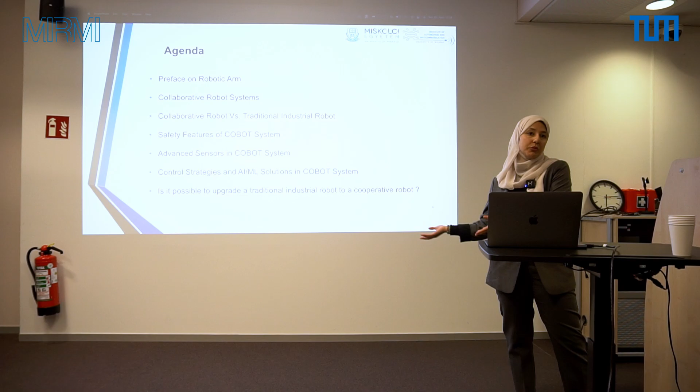After that, I would like to conclude my presentation with my actual research, where I would like to raise a question: if already the industrial robotic market has developed and designed millions of industrial robotic arms, is it possible to upgrade these robots to be cooperative and smarter, rather than building new ones from scratch? So we will answer this question in this presentation.

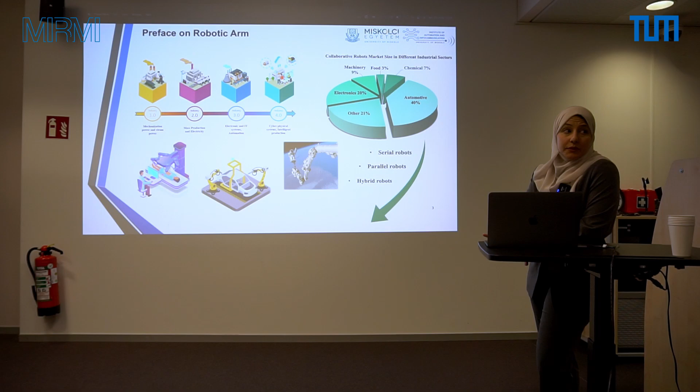If we look through the historical line of industry, as you know, we are in the age of 4.0. A lot of concepts are highlighted here: digital twin, cybersecurity, Internet of Things, and cobot systems, where cobot systems, it seems, are everywhere in different industry sectors like healthcare, automotive, and even space industry. Let me identify that regarding industrial robots, we have three categories.

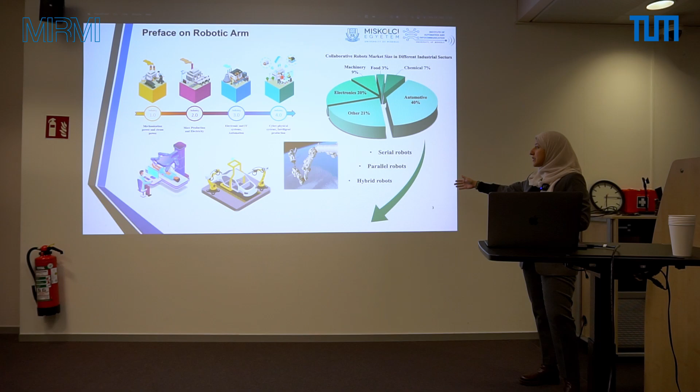We find mainly serial robots, parallel robots, and hybrid robots. This kind of categorization is related to the structure, the mechanical structure of the robot itself. In this presentation, I am dealing with robotic arms and collaborative robot arms.

So, two concepts should be highlighted, and we should be familiar with them. The first concept is the serial open chain structure. As you can see, the robotic arm takes its name from the human arm. Even the names of the parts are the same.

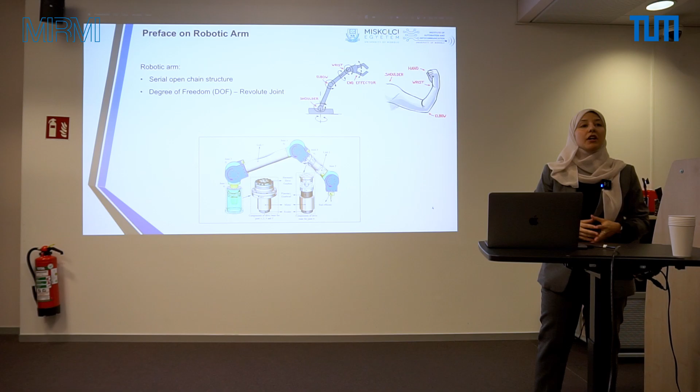We have the shoulder joint, we can find the elbow, the wrist, as well. The structure here is serial open chain. It means that we have a fixed base, and that base is connecting with different joints and links in a serial way. Why is this important to know? Because to know the structure of the robot, you can do your mathematical modeling, you can identify your dynamic model, which is important to identify the torque needed to move these joints and links.

The second concept is degree of freedom, DOF. When we are dealing with a robot, we say in industry or in the lab that this robot arm has 5 DOF or 6 DOF. The 5 DOF and 6 DOF relate to the degree of freedom.

The degree of freedom relates to the object: the object in 3D space should have 6 degrees of freedom—3 translations around x, y, and z, and 3 rotations around x, y, and z. For the robotic arm, every joint can receive 1 or more degrees of freedom, just like a human arm.

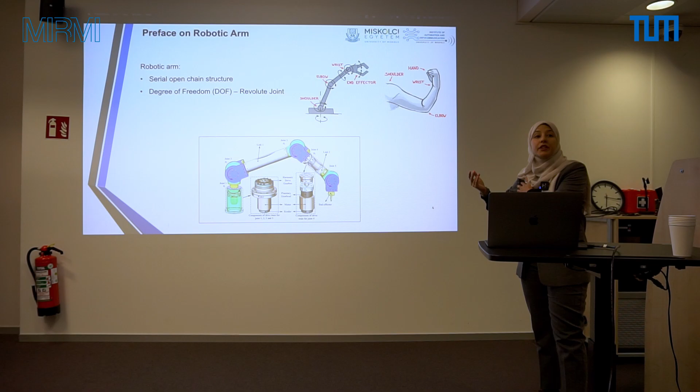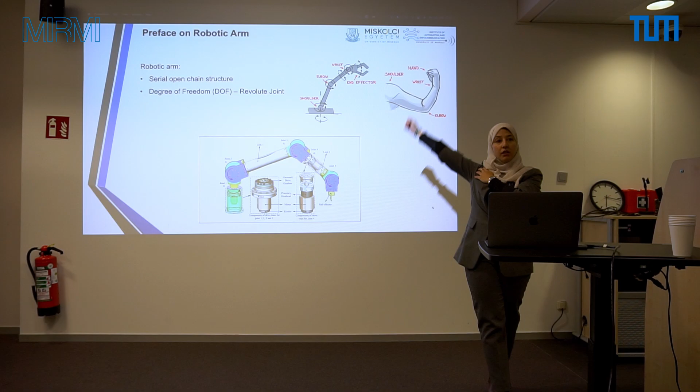For example, if I take the shoulder of a human arm, how many degrees of freedom do I have here in my shoulder? Three. Yes, we have 3: rotation around this axis, rotation around this axis, and rotation around this axis. So we have 3 degrees of freedom. The robotic arm also can receive, for every joint, 1 or more degrees of freedom.

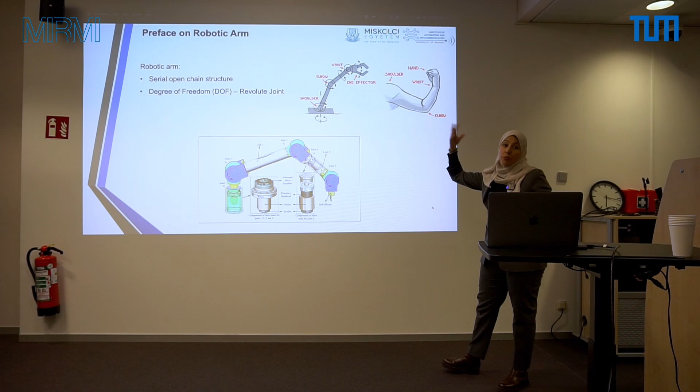Mainly, what we meet is a robotic arm with 5 degrees of freedom, where every joint includes 1 degree of freedom. These joints are moving with a motor, of course, and the motor compartment includes, as you can see, an encoder, which measures the position and velocity—the angular position and velocity. We have the motor itself and the gear head to increase or decrease the ratio of the torque or the speed, and sometimes a driver for the motor.

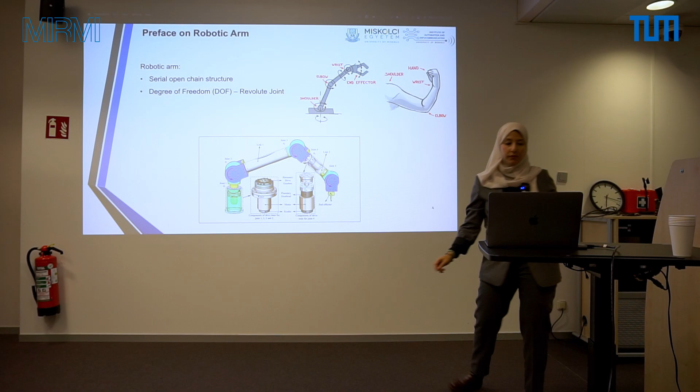So if we start to talk about Cobot, actually Cobot is a robotic arm, but with some advanced features to be friendly with the human worker. It's lightweight. If I can see from the first appearance of a robot arm, I can identify if it's a traditional one or a Cobot. How can I recognize this?

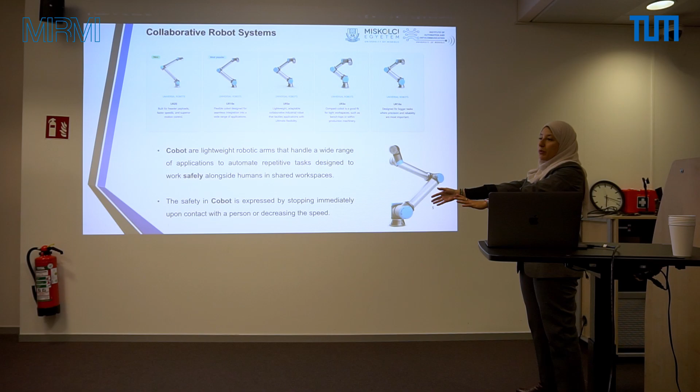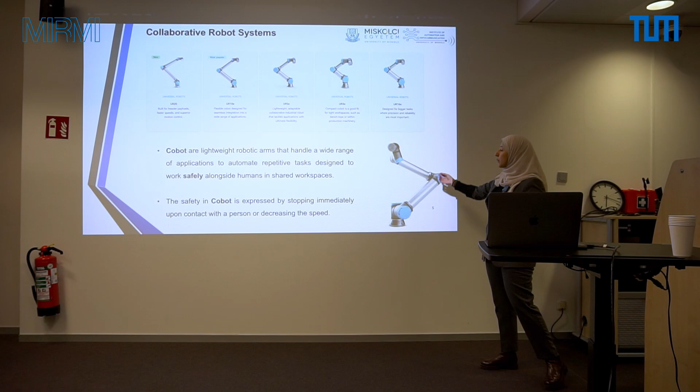From the shape. Mainly they have a curvature shape, not sharp edges. They are made with lightweight material, compact, with a compact size. They don't need extensive space to be installed. And they provide a very good safety feature.

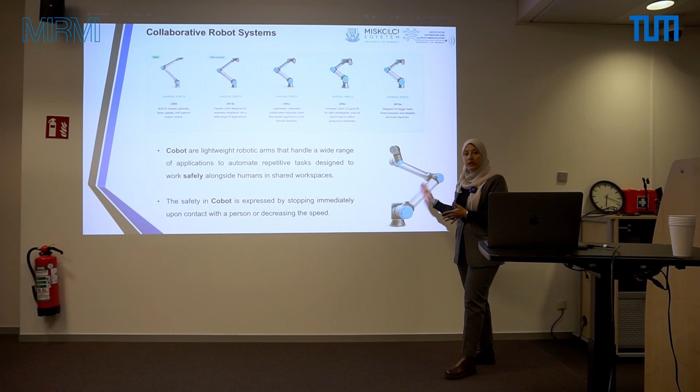The safety feature is the most important in Cobot. For example, if I am close to the robot or nearly close, the robot should stop or decrease its speed. Okay, this is a video, it will not do it.

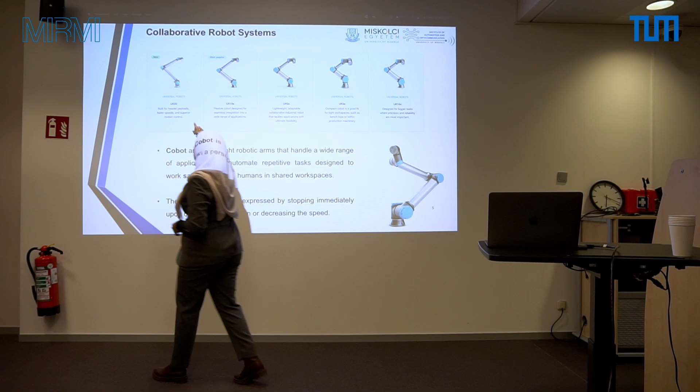Here in this slide, I am showing the top leader in Cobot systems, which is Universal Robot. As you can see, this is the newest one, UR20. If you see the characteristics, it's heavy. It can handle heavier payloads and it can be faster.

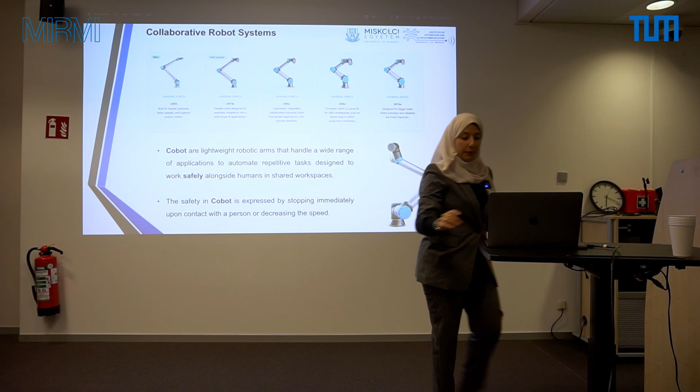Let me now go more deep. Cobot systems started to appear since 10 years ago, where traditional robotic arms have been here since decades. So I think it's important to know the main differences between these two systems. The comparison will be regarding the hardware, the software, and the graphical user interface programming environment.

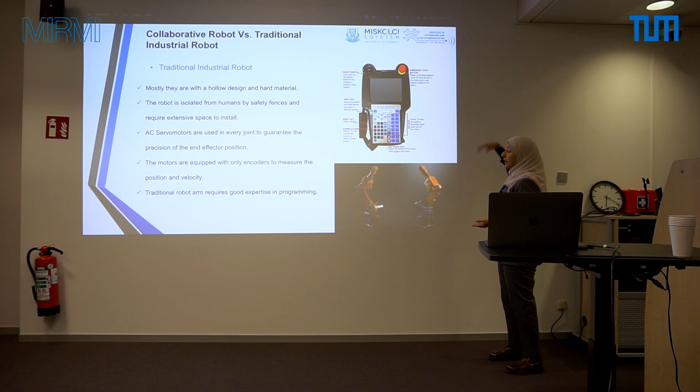So let's start with the traditional robot. As you can see here, from the first appearance, the body is big, usually more than 2 meters. And with the hard material, you can see it has a hollow shape, which can easily harm the person.

This is why we need fences. When we install a robotic arm in industry, you need fences, you need safety sensors like laser scanners, like light curtains, just to avoid the risk of harming the worker.

Also here, mainly the motors are servo motors. Why servo motors? Because in industry, let's say in automotive industry, I have many robotic arms handling doors of cars, welding. My important parameter is the precision. I would like to have precision regarding the position.

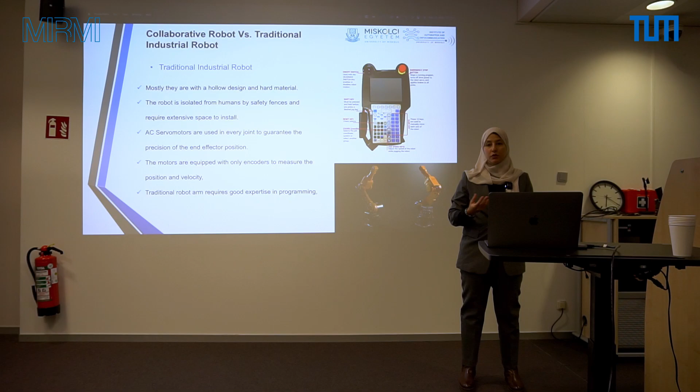So this is why I use a servo motor. A servo motor is a kind of motor which includes a closed control loop for the position, so it can provide good precision, but they are heavier. But we don't care, because here we are using hard material, so the servo motor is okay.

Also, these kinds of robots require very good expertise to program. It's not easy to program. First of all, the programming is through the teach pendant, we name it online programming.

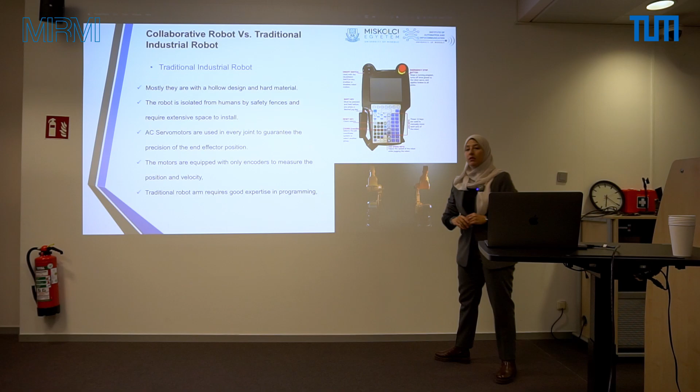It can also be offline through software, but 90% of the time we program these kinds of robots with the teach pendant, and the teach pendant is not so friendly.

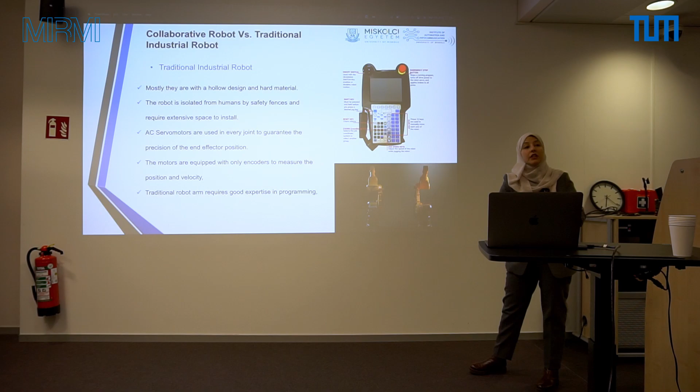For example, here you can see we sometimes have a lot of keys on the teaching pendant, and to create a position, you have to take your teach pendant and go to P1, then P2, then P3, then make the trajectory, circular or linear, according to your requirements. So it's not so friendly, and it needs time.

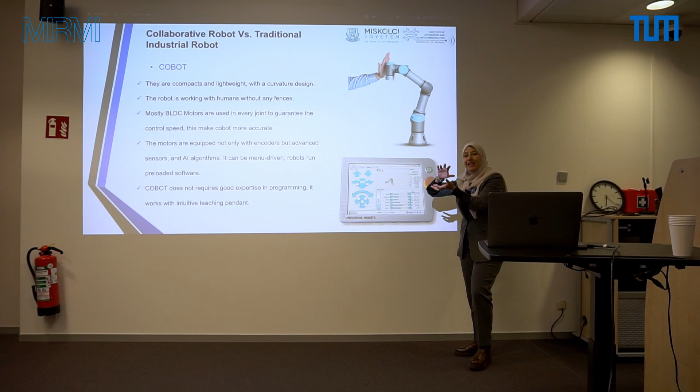Where for the cobot, we said that it's compact, it doesn't need a lot of space to install. Mostly we use brushless DC motors in the joints, mostly, not every time. Why? Because sometimes I would like to create a compact size, so I don't need a big motor. This is related to the design, the body design.

Also, a brushless DC motor can provide good speed control. The motors here are not equipped only with encoders. There are more advanced sensors that we will see later on.

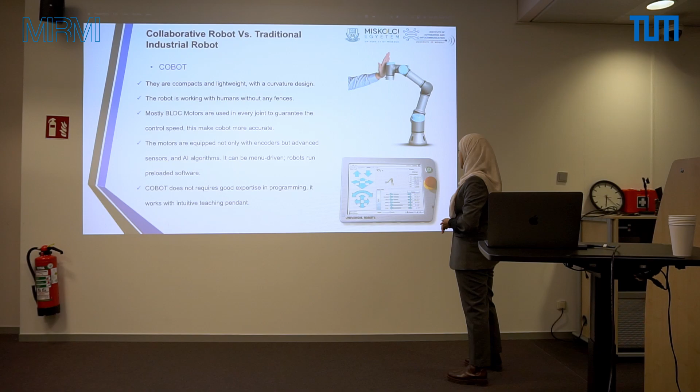And for the programming, it's very easy. It doesn't need good expertise, where here the teach pendant, as you can see, is very intuitive and doesn't really need good expertise. Okay, and another good feature that I really like in the cobot is the ability to create your trajectory or execute your trajectory from the cobot itself.

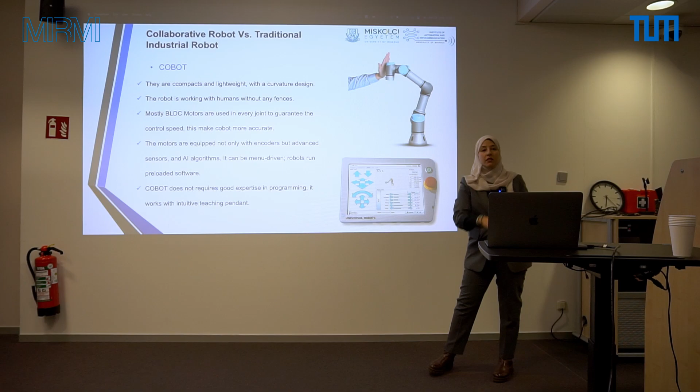There is a function we name hand guidance. This function works just by clicking on the head of your cobot and you start to guide it according to the trajectory. Somehow I am teaching my cobot the trajectory and it can execute it. This is because it has a free motion mode and it can help.

So to say that I have a cobot, and I could build a cobot, of course there is ISO. According to ISO standards, a certified cobot must provide at least one of 4 safe collaborative applications.

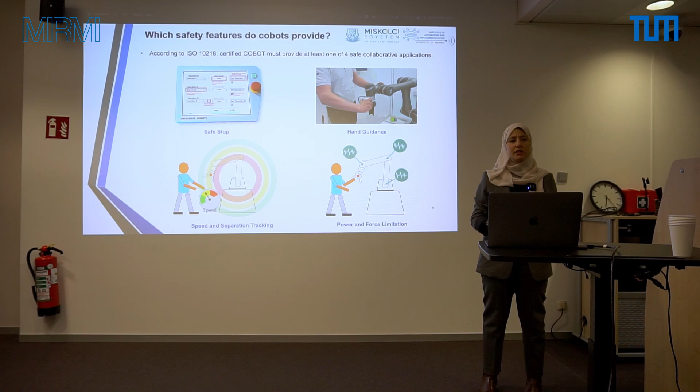The first function is safe stop. Everything can be stopped with an emergency stop button, but in a cobot, the cobot itself can provide this stop function. If I am getting very close to it, the cobot will stop by itself, or I can use the emergency stop button.

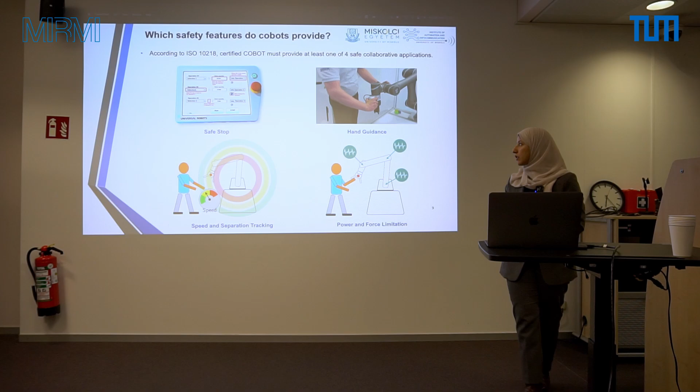Of course, the second feature is hand guidance. This video shows you how the worker is teaching the robot the trajectory.

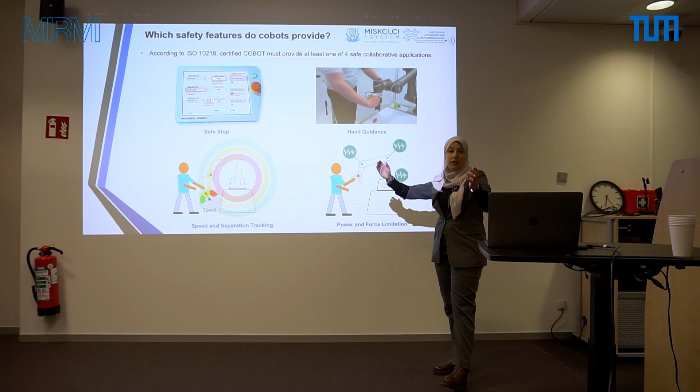We have also speed and separation tracking. For example, this is my cobot and this is my workspace. This feature can allow the cobot to divide the workspace into zones - we have zone 1, zone 2. So the robot in zone 1 maybe will execute the trajectory at some velocity, and in zone 2 it changes the velocity. So this is speed and separation tracking.

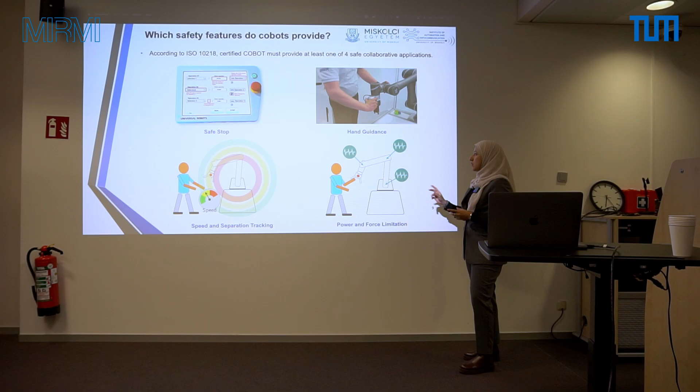And we have power and force limitations. This is when I go close enough to the cobot, it will not stop directly. There are limitations in the joints.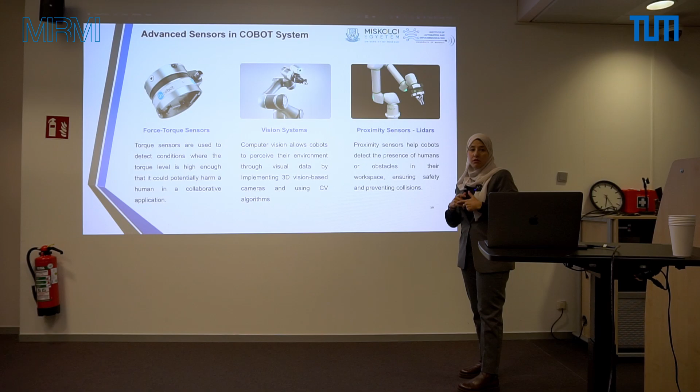These features are realized by the advanced sensors included in the cobot. The most important sensor that should be included in the cobot is force or torque sensors. Torque sensors are used to detect conditions where the torque level is high enough - if the torque is high enough, the robot will stop or decrease the velocity.

We have also vision systems, of course. Vision systems allow us to create computer vision algorithms - why? To avoid collision, or to detect an object or a worker, and it can stop.

We have as well proximity sensors or lidars. Lidars are a kind of sensor that measure distance using laser.

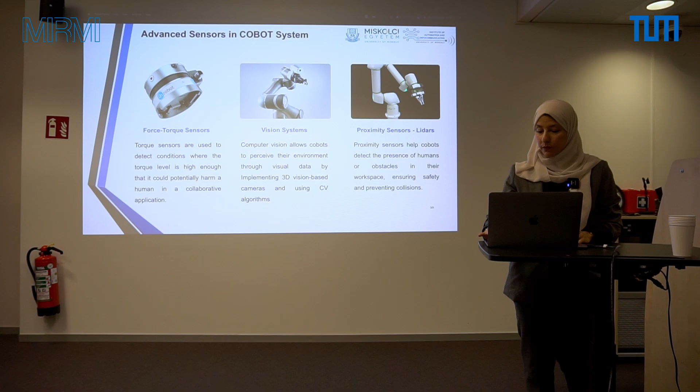Beside the hardware, of course, we should implement some software, some techniques. Here I would like to highlight collision avoidance, which is also very important in cobots, along with trajectory planification.

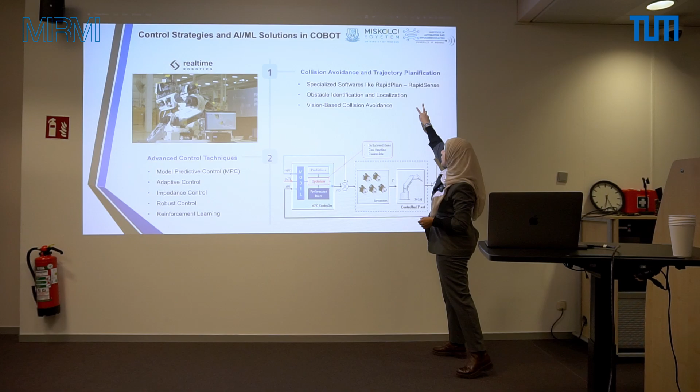Last year, I came across this software, which was launched by Real-Time Robotics in 2021, and it's just an amazing solution for robotic arms, for industrial robotic arms, and for cobots, because Real-Time Robotics launched two solutions, Rapid Plan and Rapid Sense. They are working together.

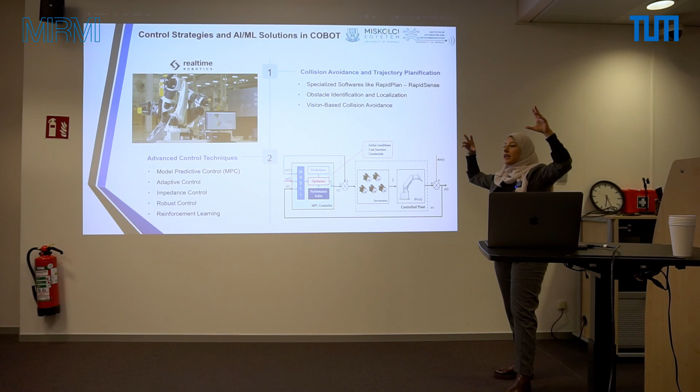Rapid Plan is a kind of software which can calculate in real time the optimal trajectory for the robot. And Rapid Sense, by cooperating with 3D cameras, can identify objects like the worker or anything in the working space, and send the data to Rapid Plan, which can create, at the same time, the right algorithm to avoid that obstacle. So it's just amazing.

Also, because we are in the world of DIY, do it yourself, we can somehow create something like this. How? By using a camera, and we can create it using a computer vision algorithm or genetic algorithm. We can also plan our trajectories.

For control techniques in cobots, we actually try not to use a simple PID controller - we go deeper and use advanced control techniques. Why? Because for a cobot, I am focusing on the torque, the forces exerted by every joint. So in case someone or an obstacle comes, I would like to stop, I would like to decrease the motion. Therefore, I need to handle force control techniques.

Some techniques like model predictive control, adaptive control, impedance, and robust control are the best, or also reinforcement learning, which has recently shown its potential in the field of controlling dynamic systems.

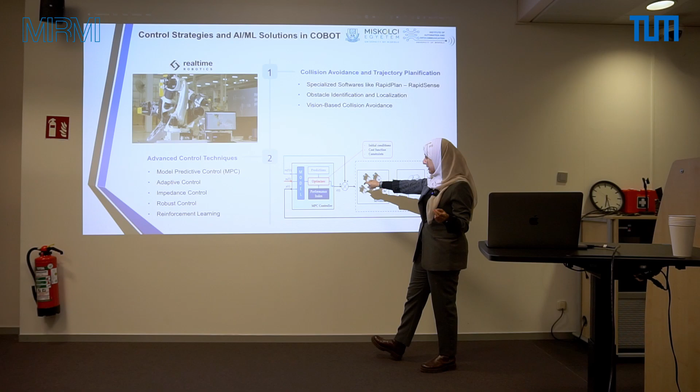So as you can see here, this is a loop. We have here a robot, this is the servo motors for example, and here we have an MPC controller. The MPC controller has a function to optimize - it can be anything, you can set it. In this case, I am handling the function of torque to optimize the energy consumption.

And now I come to this question: after checking the differences between a traditional robotic arm and the cobot system, is it possible to upgrade a traditional robot to be smarter and cooperative? From my perspective, I think for a huge robotic arm, which can be found in the automotive industry for example, it's hard - it cannot be.

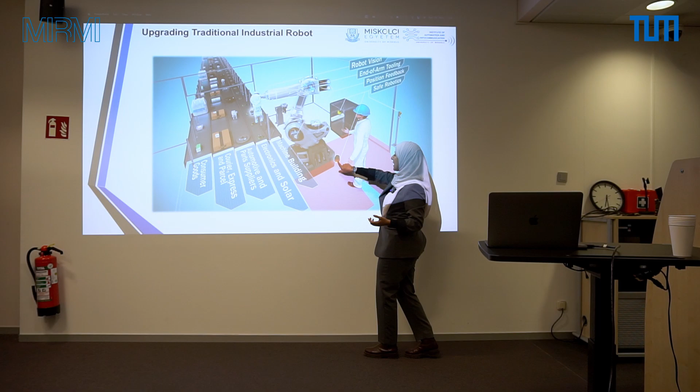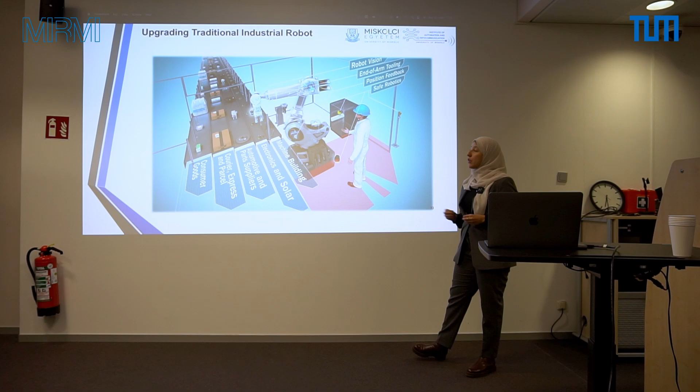Why? Because even if I add the advanced sensors, the computer vision, I need also safety sensors, as you can see here - this is a laser scanner. I will have the same body, the same heavy links and sharp edges. So the risk will always be there for the human operator.

But for small bodies, like this one - also a traditional robotic arm, by the way, but a smaller version. We have here KUKA, ABB, Fanuc, and Mitsubishi. I think it can be done. And this is my actual research, by the way.

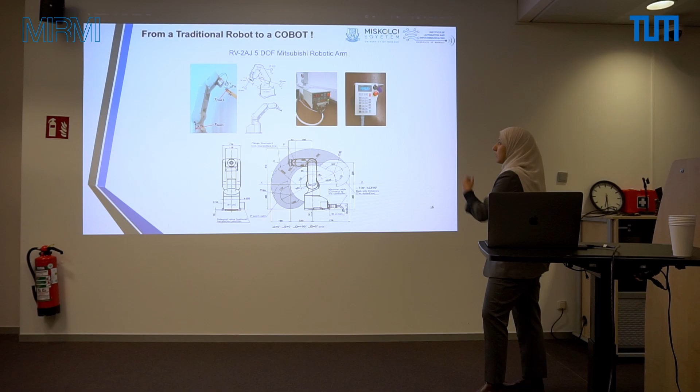In our lab, we have a very old robotic arm from Mitsubishi, the RV-2AJ, with 5 degrees of freedom, 5 rotational joints, a very old controller, and a very old teach pendant. I said, why not make this robot more cooperative? So I started to order these kinds of devices.

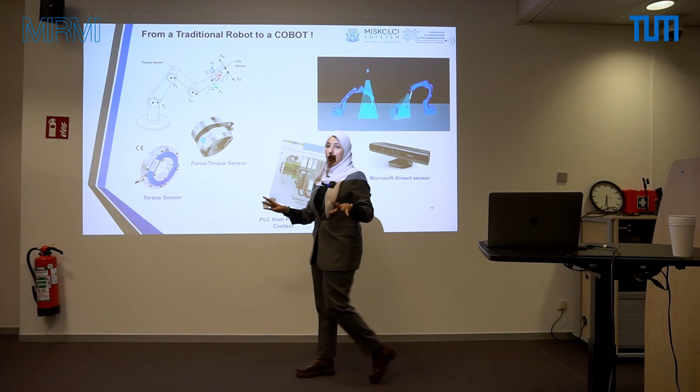First of all, I would like to deal with the torque sensor, because I would like to measure the torque in every joint. Here there are two solutions. There's this solution, a torque sensor, and if you go with this solution, you have to integrate this sensor in every joint.

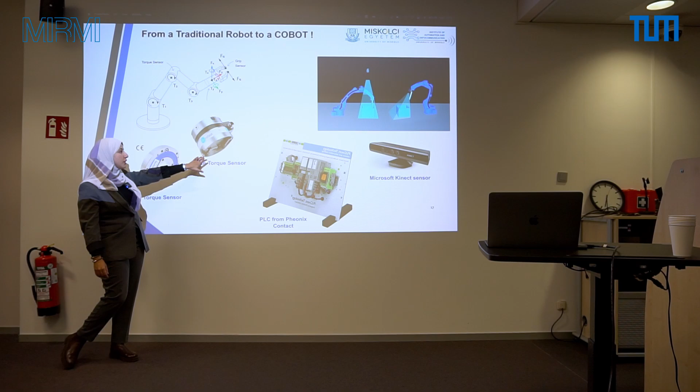The second solution is provided by Universal Robot. This sensor is a force torque sensor. It can measure in 6 axes, as you can see. And if you use this sensor, it should be integrated in the end effector, as you can see.

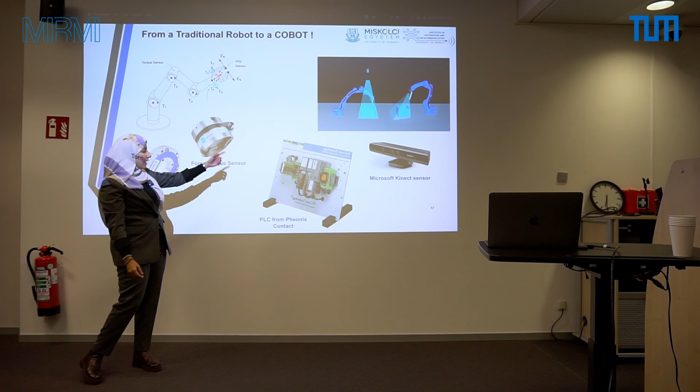As well as, I wanted to change that controller. That old controller doesn't work, it doesn't give me what I want. So I am planning to use a PLC from Phoenix Contact. Why this controller? Because there are 2 points. The first point, this PLC has software called PLC Next Engineer, and Phoenix Contact created a very nice solution so that PLC Next Engineer can be synchronized with MATLAB Simulink.

If there is such a synchronization, it's great for me because I am a MATLAB lover. Usually I build my models there, I simulate them. So if I can import the Simulink model to PLC Next Engineer and then download it in this PLC, it's just the best. Also, this PLC provides safety features. You can add a module for a safety PLC relay, so it can be certified as a safety system.

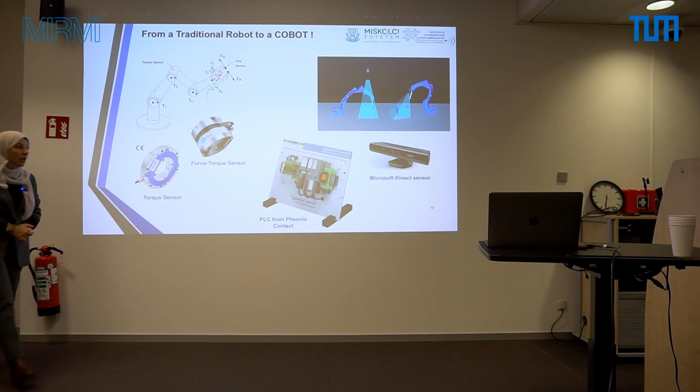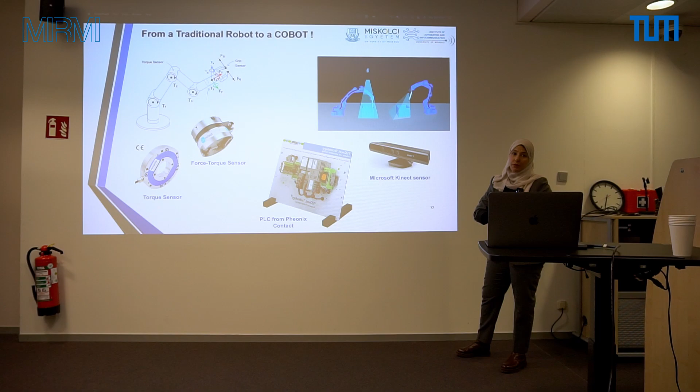As well as, I would like to use a Microsoft Kinect sensor for vision and for measuring distance. Here there are 2 hypotheses in research: some say it's better to put the camera in the head of the robotic arm, others say it's better to make it in a fixed position. I will go with this direction because I don't want to make it more complicated. I will focus just on a small area and try to control and make the tests in a very fixed area.

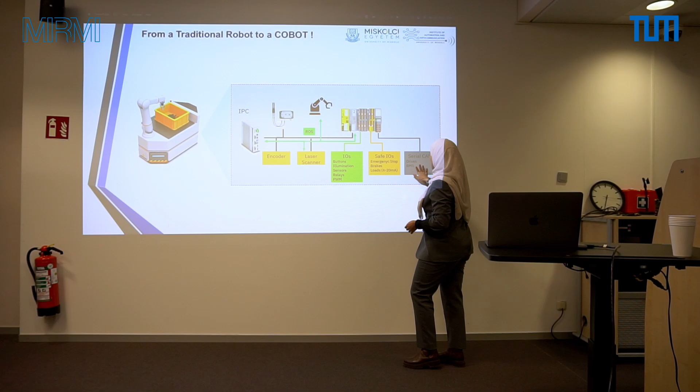Mainly, this is the plan. As you can see here, this is the PLC, and by the way, this PLC Next controller can also be synchronized with ROS. So here you can see that I can put my safe IOs, emergency stop buttons and stuff. I can also put the IOs of the robotic arm, and I can add sensors like encoders and a laser scanner.

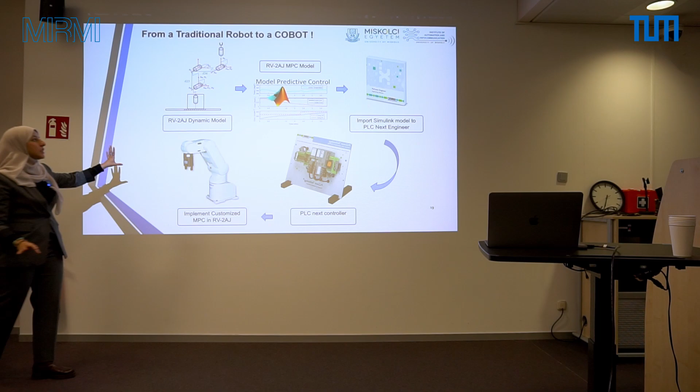And this is the plan: having the dynamic model of RV-2AJ. It's done, it's in my packet. I created the model predictive control — I started to use model predictive control because I wanted to make some tests. And I am in this phase, importing the Simulink model in PLC Next Engineer to download it in the PLC.

In terms of precision, PID was the best, actually. But in terms of controlling the energy consumption and the torques, MPC showed good results in this regard.

But I was not satisfied yet. Why? Because PID and MPC are both linear controllers, and as you know, the robotic arm is a nonlinear system — everything here is nonlinear, by the way. So how can you control something nonlinear with a linear controller? The controller will have some boundaries, some limitations to handle the nonlinearities of the robotic arm. This is why I am now trying to use nonlinear MPC and going forward to use adaptive control theory, which is also a nonlinear solution, to see the results.

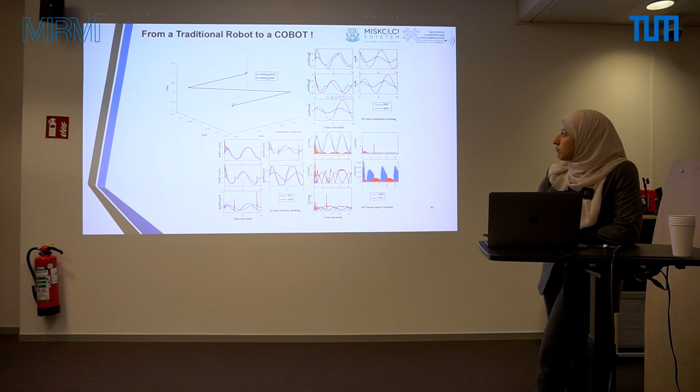Thank you for your attention. And if you have any question, please let me know. I am here.

Next speaker, Majid Khadiv, is an assistant professor in the School of Computation, Information Technology at the Technical University of Munich. He leads the Chair of AI Planning in Dynamic Environments at TU Munich and is also a member of the Munich Institute of Robotics and Machine Intelligence. Prior to joining TUM, he was a research scientist at the Empirical Inference Department of the Max Planck Institute for Intelligent Systems with director Professor Bernhard Scholkopf. Before that, he was a postdoctoral researcher in the Machines in Motion joint laboratory between New York University and Max Planck with Professor Ludovic Righetti.

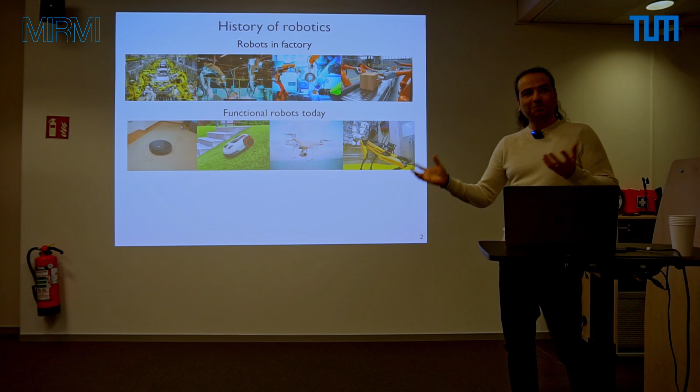Nowadays, we can see more and more robots going outside of this controlled environment. They can move around and they can do basic stuff like inspection and so on. But still, we cannot see that these robots can do interaction with the environment or do the things that we wanted them to do.

So if you look on the left, you see an airplane factory, and nothing there is automated actually. Or you can see here in our kitchen, none of our robots can basically clean this kitchen or do tasks like this, and they cannot interact with humans. So this is what we want.

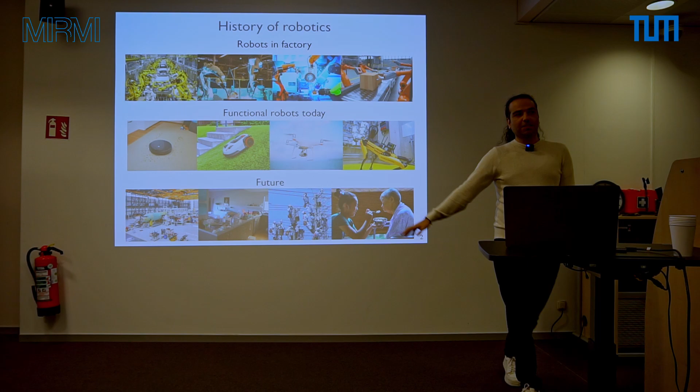So what is missing? I think we need to have robots that could go everywhere that the human can go. We need to have a versatility like this, such that the robots can do tasks in such a difficult situation. They should be dexterous enough such that they can manipulate this wide range of objects you can see in this picture. And finally, maybe less importantly, maybe far into the future, they should be acceptable by humans if they're going to be deployed in human settings.

I believe, it's a personal view, that humanoid is the best platform for this. Maybe it's not the most performant one for each of these tasks, but it's the one that can be used in all of them. So I believe if we solve humanoid robotics, we pretty much solve all the problems that we see there. If you disagree, you can just comment or raise your hand, it's absolutely fine. And also just interrupt me if something doesn't make any sense.

So this is super difficult. That's why we try to basically deal with simpler problems like quadrupeds, bipeds, or fingers for manipulating objects.

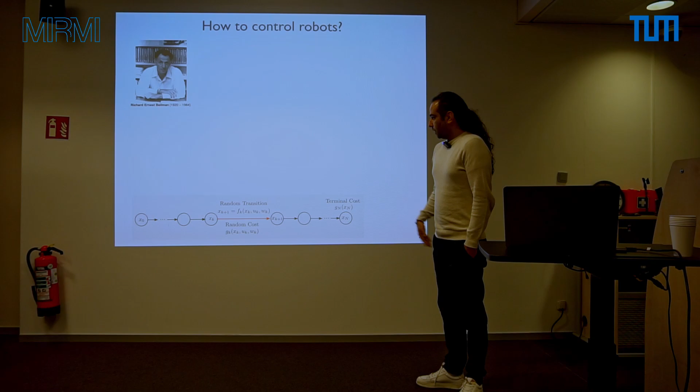So the way I look at the problem is through the lens of optimal control, which was formalized by Richard Bellman. In a very simple setting, we want to bring a system from a state x0 to a final state xn. At each state xk, there is a transition to go to xk plus 1, and there is a cost associated with this transition. Then the idea is to minimize the cost and bring the system to xn. So this is the optimal control setting.

So the main principle that I use for my research is the principle of optimality proposed by Richard Bellman. In plain text, it says that independently of the initial state and initial decisions, at each state, the remaining part of the decision should constitute an optimal policy such that the policy is optimal. So it's a very simple idea.

As Richard Bellman pointed out, naively applying this principle to control of systems suffers from the curse of dimensionality. What it means is, consider you want to move one point in space. You have 3 positions, 3 velocities. If you only consider 10 possibilities for each of these values, you end up having 10 to the 6 possibilities. Enumerating over all of this is really difficult—if you increase 6 to 7, and this was only 1 point, you'll be having 10 to the power of 7 possibilities.

So this explodes exponentially, and I talked about only 1 point. Now how about this humanoid robot, where the number of states is something like 100, and each of the states is actually a continuous variable.

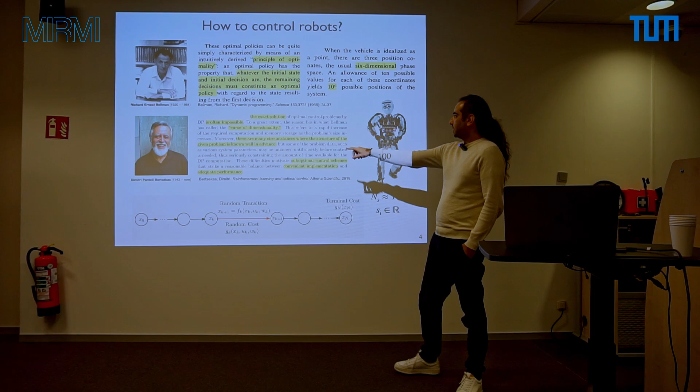So this explodes, and basically you cannot solve it, forget about it. As I said, this is called the curse of dimensionality, a term first coined by Richard Bellman. But as pointed out by Dimitri Bertsekas, there are many circumstances where we actually know the structure of the problem in advance.

For instance, in robotics, we know the physics of the system. We know the constraints of the system. So if we leverage that, then maybe we can beat the curse of dimensionality and solve the problem.

And the other thing is that maybe we do not care about the global optimality of our decisions. The only thing we care about is having something that works, which means suboptimal control schemes that make a balance between convenient implementation and adequate performance.

And this is exactly what I do in my research. I try to find tractable approaches such that I can solve control decision problems for these kinds of settings.

So these are the robots I've been working on during the past 10 years, and I'm going to show you some of the results. So I'm going to talk about a bit of math, so bear with me. I try to simplify things so everybody can understand, but if something is vague, just ask.

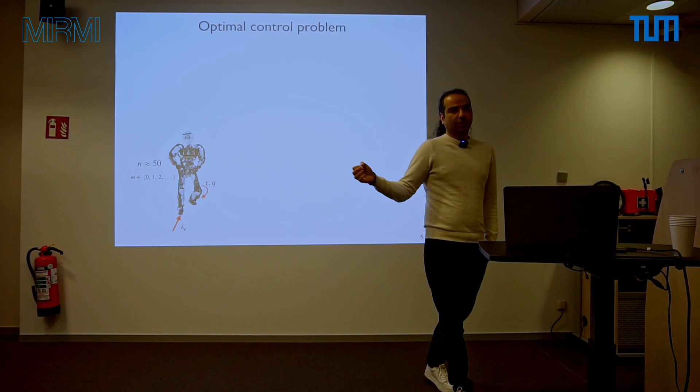So to solve the optimal control problem for humanoid robots, there are 3 decision variables we are interested in finding trajectories for. One is the interaction forces, lambda. One is tau, the joint torques, and one is q, the trajectory of the joints.

Normally we have a system with n, the degree of freedom, of 50. So it's a very high dimensional system.

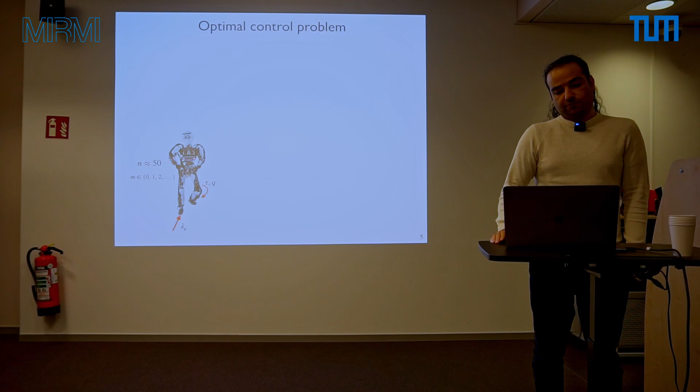And we have something like m, the number of contacts with the environment, which varies depending on the configuration of the robot with respect to the surfaces or the environment. We would like to minimize the cost functional, which is an integral of a sum of some cost into the future.

This is like, for instance, I want to track a trajectory, I want to minimize the energy, I want to minimize the sum of torque or something like this. And the idea is that I want to find a trajectory for those 3 variables that I talked about.

And normally we have a terminal cost that helps us provide some guarantees. We would like to bring the system to a terminal set such that we are sure we are getting the behavior we want.

So the main constraint of the system is physics. We have rigid body dynamics, the simplest way we can write down the dynamics of the system. But there are a couple of problems there because actually these dynamics are highly non-convex.

There are many sines and cosines multiplied by each other. And if you just look at this dynamics, it's super nonlinear and non-convex. So it's difficult to solve this optimization problem because of this non-convexity.

The other problem is that these robots are under-actuated. What it means is that you do not have tau, or torque, on each row of this set of equations. Some of them are 0, which means that the base of the robot is not actuated directly by any actuator, right? It's free. It's only actuated indirectly through these contact forces.

And interestingly, these contact forces, the number of contact points, changes over time, which means the system is hybrid. That means the structure of the dynamics of the system changes depending on how many contacts you have. So this is even more difficult.

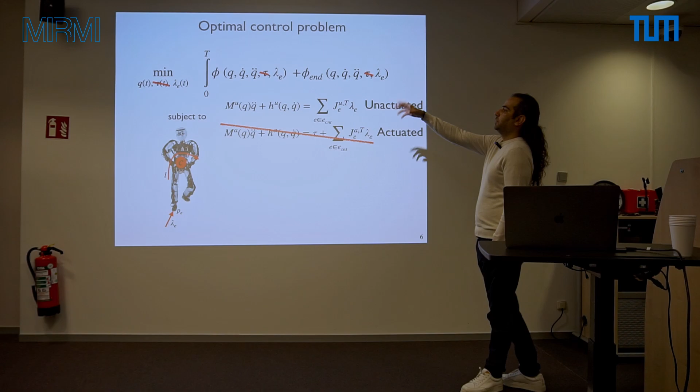I also got rid of many decision variables, the torques, and I only need to optimize over Q, the joint motion, and contact forces. So this is already very much simplified.

Interestingly, I can show this dynamics can be exactly written as a simpler dynamics: interaction forces, the external forces on the system, equal m times c double dot, the center of mass acceleration, plus g. This is Newton's equation, considering the whole robot as one rigid body. External forces equal acceleration, and here's the rate of angular momentum around the center of mass.

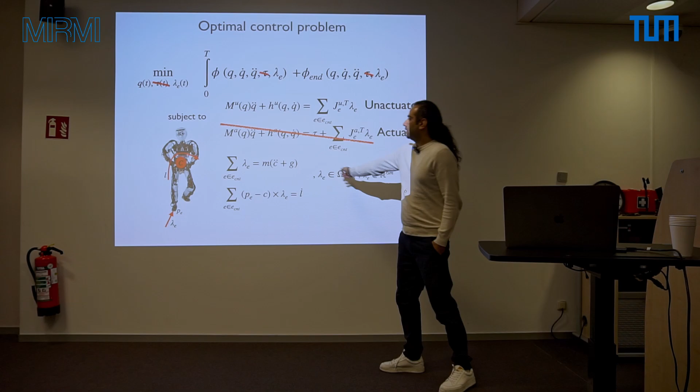Now I have 6 equations, but I also got rid of Q, which was n variables, and replaced it by center of mass and angular momentum around center of mass. So now I only have 6 variables for the trajectory of center of mass. Again, from here to here, there was no simplification, it's exact, it can be shown.

This is cool. Now I only need to find the interaction forces, center of mass trajectory, and angular momentum around center of mass trajectory, each of them something like 6 to 12 dimensions. Now it's under control, I can solve it. This is called centroidal momentum dynamics.

This optimization problem is based only on the assumption that I have enough torque in my joints, that's the only assumption. I'm finding K, the set of center of mass and angular momentum around center of mass trajectories, and the contact forces lambda. These are the equations of motion of the system, and this is the interaction forces constraint, the friction cone constraint.

Now I can solve this, and it's still non-convex. I'll talk about this later, but we developed a solver based on sequential convex approximation so we can solve this optimization problem.

Interestingly, if we solve this problem and get center of mass trajectories, we can pass it to a kinematic solver to track the center of mass trajectories and find the joint trajectories, considering contact constraints. If we go back and forth between these equations, there's no guarantee, but sometimes it converges to a solution satisfying both problems' constraints. This is called block coordinate descent.

You go back and forth between two optimization problems, and it's more detailed than I want to go through. I'm just giving you some high-level idea.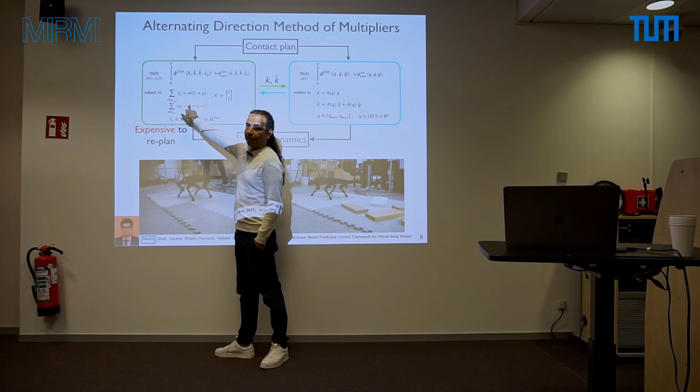So the way we do it is very simple. The high level idea is this: you keep C fixed, solve the problem for lambda, okay? Find a solution, and then use the solution, put it here, keep it fixed, and now solve for C. And each of them are convex problems.

By going back and forth, and also updating the Lagrange multiplier, you could basically show that for a convex problem, it converges to the minimum of the system, the global minimum. But this is a non-convex system, so it converges to a local minimum, but still it's fine, and it's a good trajectory.

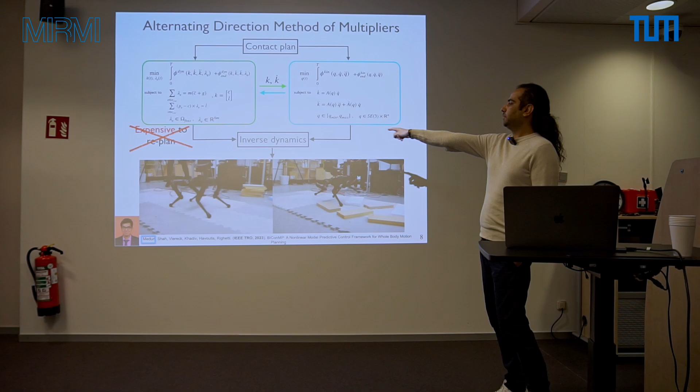With this trick, now it's not anymore expensive to solve this problem, and we can do MPC on the real robot. So this is full body nonlinear MPC, right? All of these things are replanned at every 50 milliseconds, so at 20 hertz. So this whole trajectory optimization problem together with inverse dynamics is solved at 20 hertz, and this gives quite a lot of robustness to the system, that it can handle uneven terrain and so on.

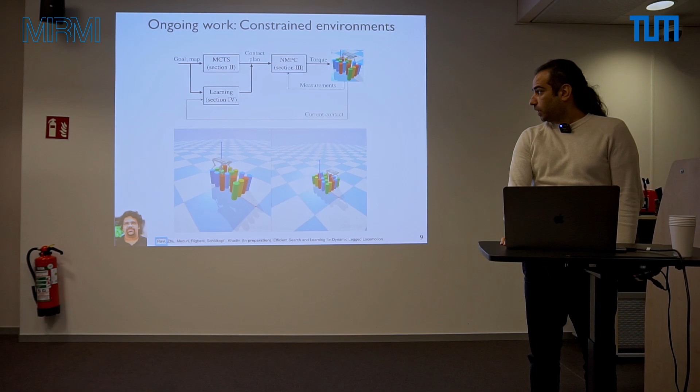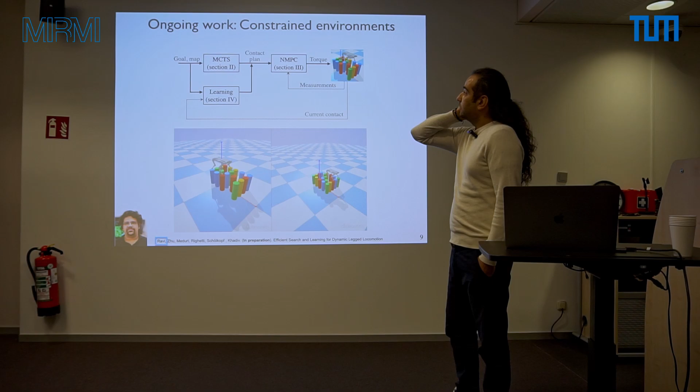Okay, this is good, but here I consider that the contact is fixed, the plan is fixed. Now if you have an environment that is limited like this one, now actually I need to find which surface I select next, such that I go to contact and I go to a desired point at the end. And here we combine this with the Monte Carlo tree search, which is a search method for discrete variables.

And then we combine this with nonlinear MPC, but this MCTS takes time because it uses nonlinear MPC to evaluate the possibility or feasibility of the trajectory. So we just did a supervised learning on the map of the environment to give us the contact plan. And with the contact plan, I mean which end effector would go to next, basically to which surface. And this means contact plan.

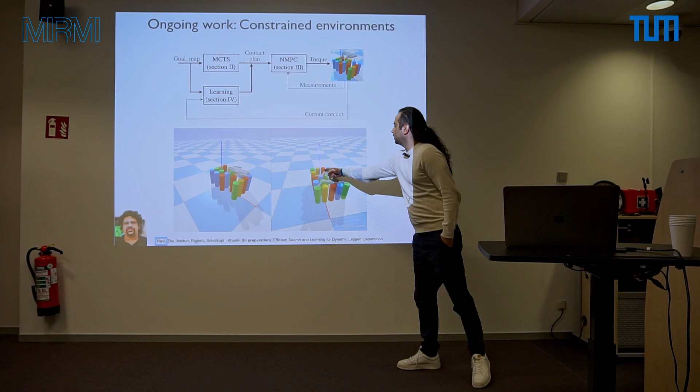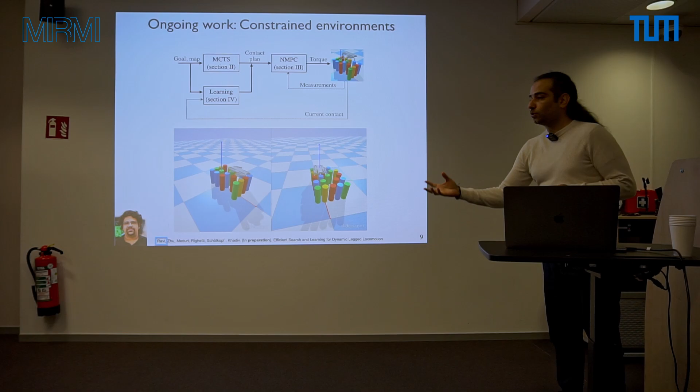And actually, so now every decision is basically automatic. So the robot selects the optimal set of basically contact locations such that it goes from one corner to the other corner. And sometimes actually it comes out with very interesting solutions. Here you see a lot of these blocks are missing, so it needs to do some weird motion to go to the end. And this is fully automatic, right? So selecting which surface to go to contact next is fully automatic, right?

So back to nonlinear MPC. So we said that, okay, now we can do 20 hertz MPC. This is great, but still there are problems. So again, as I said, this is still non-convex. So basically what we do is that we did 50 iterations of the optimization problem, of a convex one each, right? Which is quite heavy and it's not parallelizable. So you need to sequentially do this.

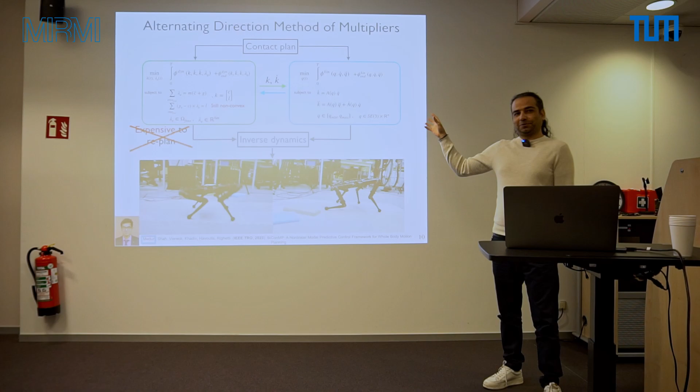We use an external computer to solve this, so forget about doing this on board of the robot. This is still expensive. And we did not optimize for the timing of the contact and location of the contact, which means that if you push the robot, it cannot adapt its behavior because these are fixed. If I start to optimize those as well, the computation time becomes double or even more, so then again you cannot do MPC. This is the problem. That's why we kept it fixed here.

Can you clarify the term convex? So we have two notions of convex. Let's start with the convex set: if you have a set, and you consider two points inside the set, if you draw a line between these points, the whole line should be inside the set. This is a convex set.

For a convex function, like this function, if we consider the epigraph of this function, then it should be a convex set — this is the definition of a convex function. So for an optimization problem to be convex, the cost function should be a convex function, and the inequality constraints should be convex sets. Equality constraints should be linear, because only a linear function can be a convex set — if you consider a line, only that can be convex. So this is what I mean by convex.

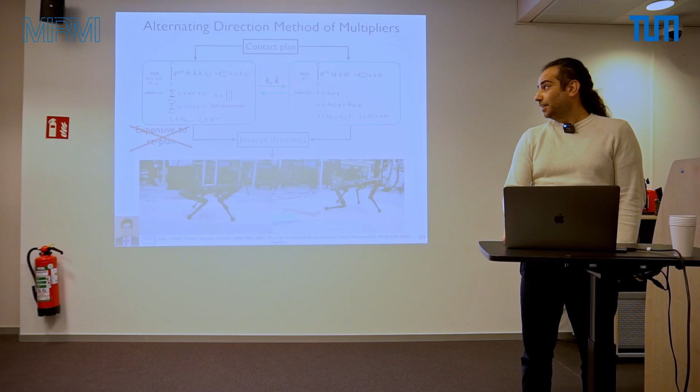Any more questions? Sorry, if I do not explain something, just ask, because I'm explaining things too abstractly, I would say. If you are interested in some part, I can explain in more detail. So these were the problems: first, it's very expensive to solve this; second, we are not still optimizing some part of the decision variables. To do that, we need to make more assumptions. There's no other possibility — I would say that was the most efficient way we could solve the problem, but still it's very difficult.

Now if I make a bit more assumptions, like the external forces pass through the center of mass — which means the rate of angular momentum around the center of mass is zero — and the center of mass moves on a certain predefined manifold. It can be anything, the shape doesn't matter, it just should be predefined. For instance, for walking, the center of mass moves on a plane; for running, it could move on a parabola or something.

If you assume these two things, we could show that the non-convex part of the dynamics can be written down as two linear dynamical systems. This is called center of mass dynamics. If you know basic control theory, we have C dot here and minus C here, which means the system is stable — the center of mass converges to this variable, called the divergent component of motion, DCM.

If you look at the DCM dynamics, we see xi dot here and plus xi here — this is basically unstable dynamics. It diverges from P, which is the contact location or center of pressure. So it means that if I walk, the divergent component of motion just diverges, and if I do not step in that direction, the system will fall down.

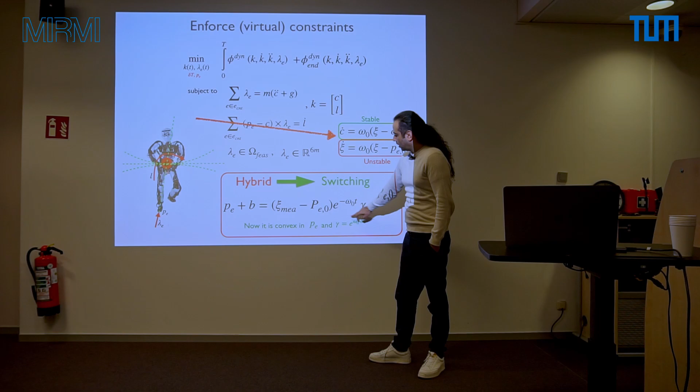It simply means that. Using this kind of separation, we can now write down the dynamics of the system as a linear function of the exponential of the time of the gait and the contact location. This is great because now we have a convex optimization problem, given those assumptions. This limits the range of motions we can do, but at least we have convex optimization — easy. We can now do 1 kilohertz MPC on this system. And now, if someone gives me a contact plan, for instance for walking, it's simple.

Because it's right, left, right, left, the contact plan is very simple. I can adapt the step location and timing using this convex optimization problem, and then I can pass it to an inverse dynamic solver to find the full body torques of the system.

With this, we were able to have very robust sets of motions on our real robot. So what the robot does is get feedback of the base, and then it's adapting all the time its location and time of contact, such that it recovers from some disturbances.

Here I'm moving around basically this platform, and the robot is adapting contact location and timing to recover from these disturbances.

So we can guarantee some things, like something called the viability kernel, which is related to maximum invariant set in control theory. Viability kernel means it's the set from which there exists at least one control sequence such that the system doesn't go to the fail state. For locomotion, it means the system doesn't fall down. So this viable set, finding it is...

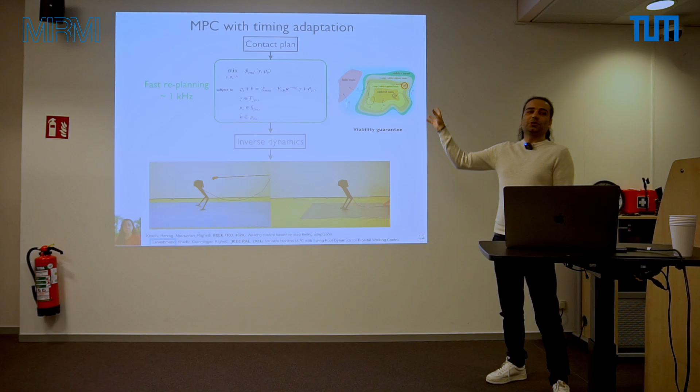With this optimization problem, we could guarantee viability, which is a big deal, but we could only do it for the simple system. For general nonlinear systems, there is no guarantee. We do not guarantee anything, so we just tune things such that they work properly. But this one has guarantee.

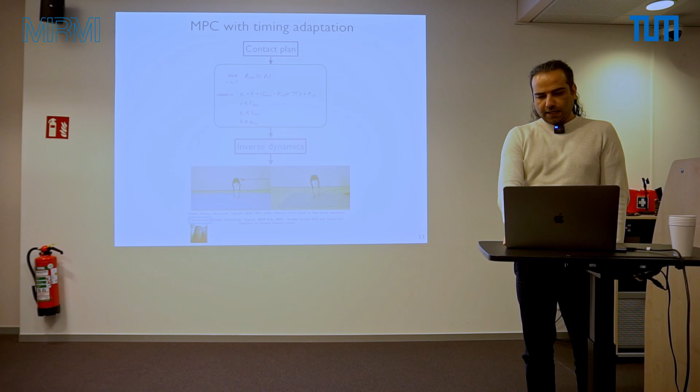To show that it's a general approach, we tried it on three robots and it worked very well, as you can see for the quadruped. We could also show this works for running. The only thing you need is to change the manifold of the trajectory of the center of mass in Z, and that's it. You are adapting step location and timing at 1 kilohertz, so you could do push recovery, switching between walking and running, also walking on uneven terrain.

That's good. But if you've worked with robots, you know that all the things I show in simulation, when I start doing them on the real robot, this is what happens. There are many failures. I'm sitting there with this, stop. I'm very careful that I don't damage a robot, but we break a lot of robots.

It's a very demanding task sitting there and tuning parameters of these controllers, and it would be nice if we could do this automatically. This is another project we did with another student of mine, where we started using Bayesian optimization to optimize the cost of the MPC.

What we do here is get feedback from the behavior of the system. For instance, if the robot wants to track a velocity, the performance is to maximize this, and if the robot falls down, we give a high penalty to this optimization problem. Basically, this is a black box optimization problem, but it's very sample efficient.